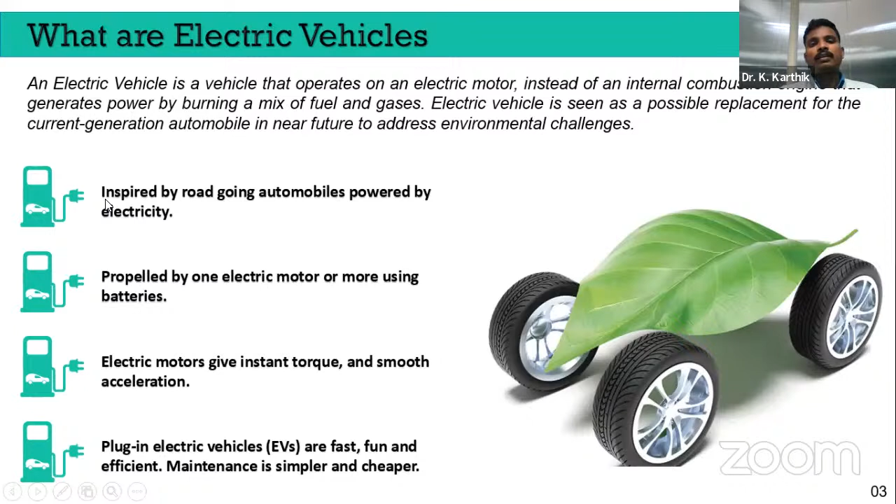It is having a lot of positive signs. First one is... your internet is very slow. Oh yeah.

So the first point is, it is inspired by road-going automobiles powered by electricity, so there is no need to fill any fuel, and it runs on one electric motor or more using batteries. We have a battery pack in the electric vehicle, so it can produce current automatically when you plug it in for charging. It has instant torque, and when riding you won't get much noise compared to diesel or petrol vehicles. So it is very easy, fast, fun, efficient, and maintenance is much easier compared to non-electric vehicles.

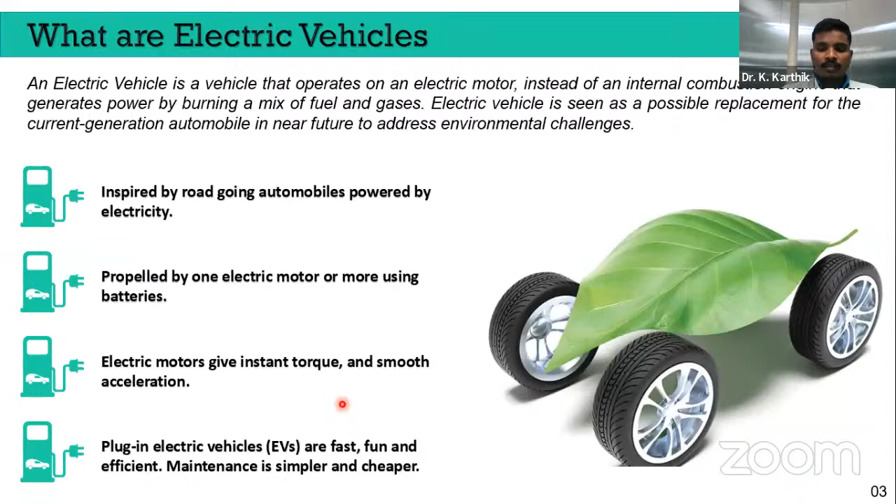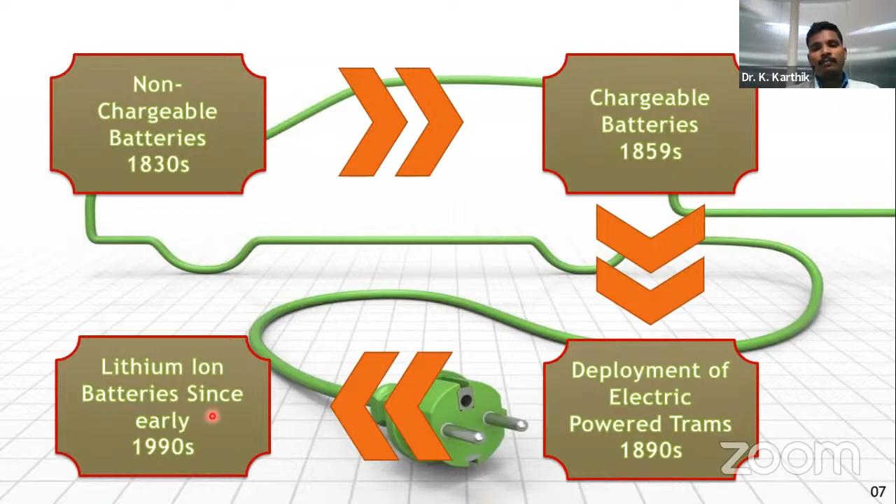After that, we are facing a lot of improvement in the electric vehicle. So why are we moving into EVs? The number one consideration is air pollution. By using fossil fuels, the emission of CO2 and all the gases is causing air pollution.

According to Greenpeace research, they were checking the air quality in India, taking cities like Delhi, Mumbai, Bangalore, Hyderabad, Chennai, and Lucknow. Compared to other Indian states, Delhi has the most pollution. If you see the estimated death rate because of pollution, Delhi is the number one pollution place.

Out of the most 30 polluted cities, more than 22 states covered in India are around 41 percentage NOx emission. This is in Delhi, due to high vehicle use in 2020, we are getting 41 percentage of emission. Also PM2.5, in Delhi it is 23%. This data is up to 2020, we didn't get the updated data.

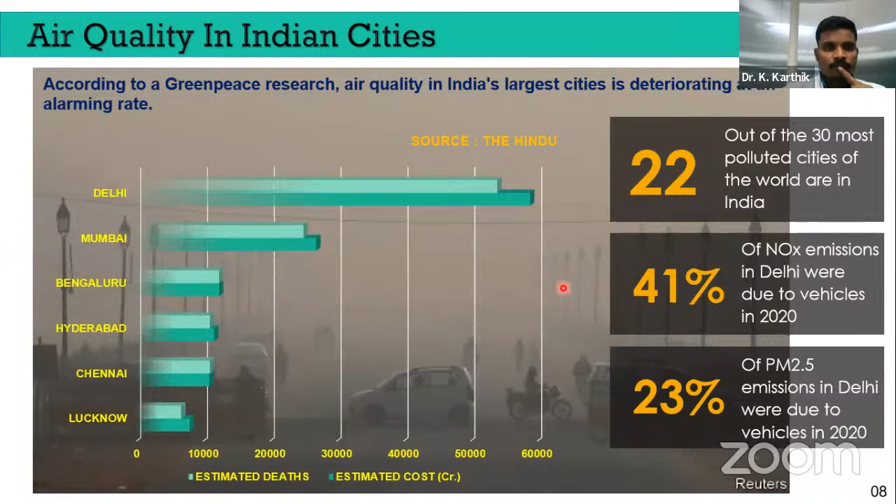So to overcome that problem, if you see this PPT, the carbon emission we can calculate by using different kinds of vehicles. Up to 15 percentage CO2 emission is because of advanced internal combustion, since we are using so many trucks, flights, and so many things, emitting more CO2. 10 to 30% is due to natural gases and biofuels.

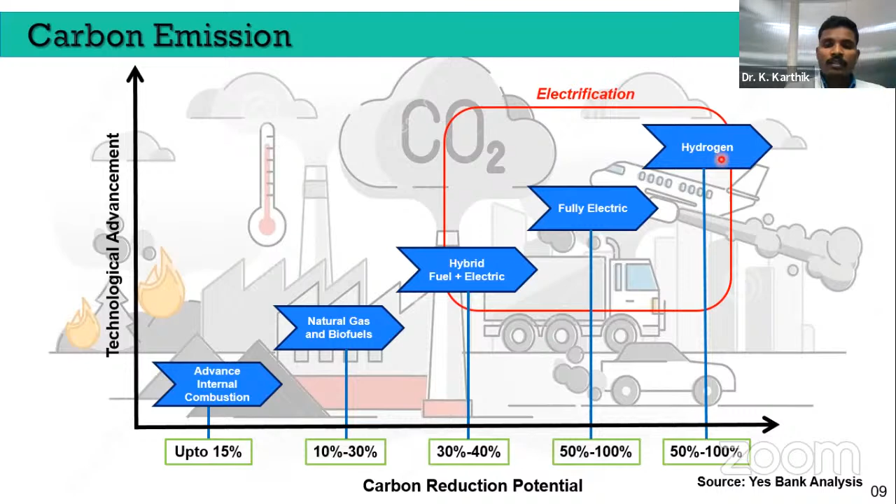If you take hybrid fuel plus electric vehicle, we can see 30 to 40% CO2 emission reduction. If you see the fully electric vehicle, it is 50 to 100 percentage reduction potential. If it is hydrogen storage vehicles, it's the same thing. Fully electric vehicles as well as hydrogen storage vehicles can reduce CO2 emission up to 50 to 100 percentage.

And number of deaths due to pollution: all over the world, the number of deaths due to pollution is much higher in India. The Philippines has 0.09 million, Brazil and Congo have 0.1 million, the US has only 0.15 million. If you consider India, it is 2.51 million per year. So it is very huge. Why? Because we are using petrol diesel vehicles, and due to that pollution, this much death is happening in India.

Compared to other countries, we are seeing the topmost 10 countries. Among them, India has the topmost death rate.

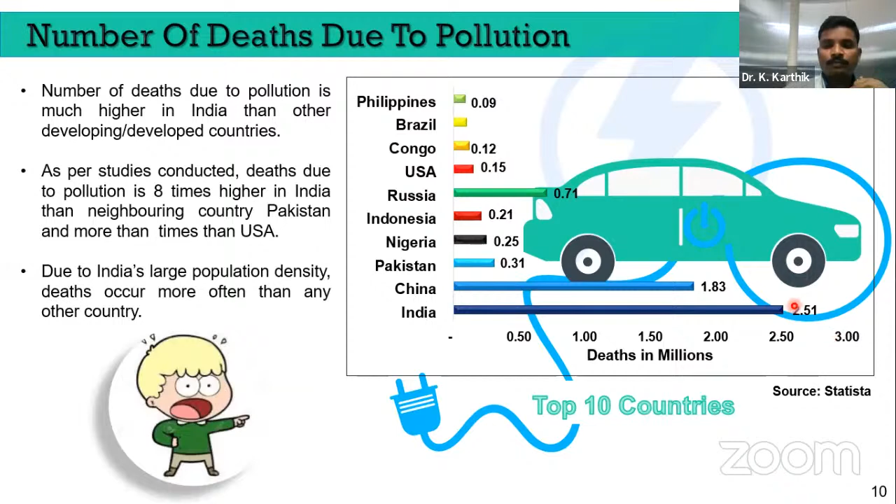So how can we control that emission, and what is the average lifetime of the emission? If you see all the petrol diesel vehicles and so many factories, because of this the emission is increased. And if you do electricity from coal, oil, gas, that also will cause CO2 emission.

So if you see this graph, the lifetime greenhouse emission depends on the types of vehicles consumers are using. If you consider the conventional petrol vehicle, emission is up to 25 tonnes. Hybrid vehicles show 20 tonnes, almost 5 tonnes lesser than conventional petrol. Battery vehicles show almost 15 tonnes. So this is the average lifetime CO2 emission. That is the only reason we need to move into EV vehicles.

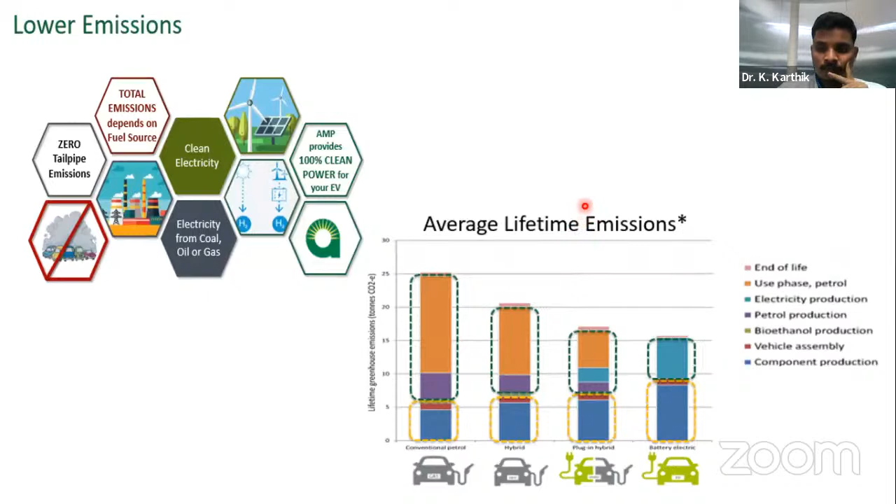So what is the major factor that attracts people into the EV world? One should know some basic parameters: reliability and affordability. When moving into any new system, first we need to think whether it will be reliable or not, and then affordability. So affordability-wise, we are comparing the price of conventional vehicles versus EV vehicles, and how the infrastructure is growing.

Growing infrastructure means, if you are using conventional cars, we can see a fuel station every 1 kilometer or maximum 5 kilometers. But for EV vehicles, nowadays the infrastructure is only growing slowly. So that kind of infrastructure facility we need to check, also service centers and all.

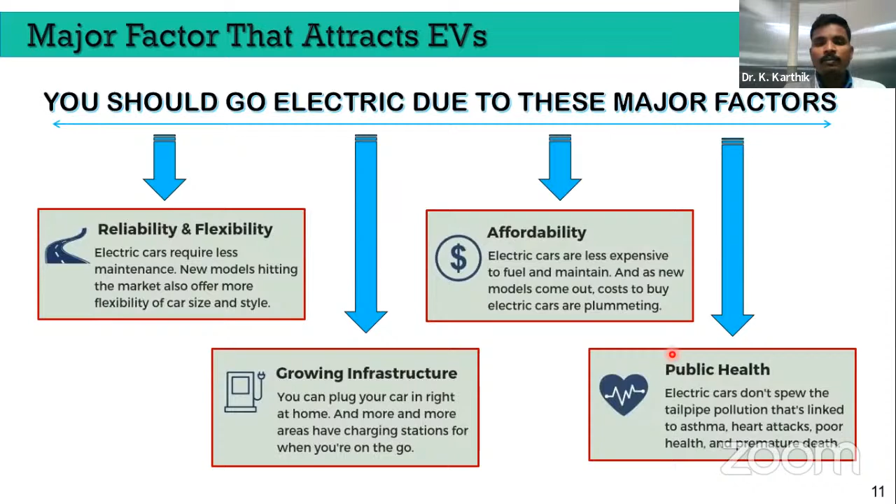Another main thing is public health. By using electric vehicles, what emission will it emit, and what kind of impact will it create on the public? That kind of thing we need to consider, along with a comparison between electric and petrol vehicles. So it is the main parameter for why we need to move into EVs.

So if you see the model, ex-showroom price, HSS means nothing but home storage system as well as large scale storage, and this is a petrol vehicle. So the ex-showroom price for the lithium ion battery car is 87,790 rupees. If you consider a lead acid battery, it's 35,490. The petrol price comes around 60,849.

So if you are considering CO2 reduction by EVs in the last 5 years, it is very much less. If you see lithium ion batteries, it is 1.9 percentage only. If you take lead acid or some other vehicles, it causes almost 2 percentage. So this kind of thing we need to check.

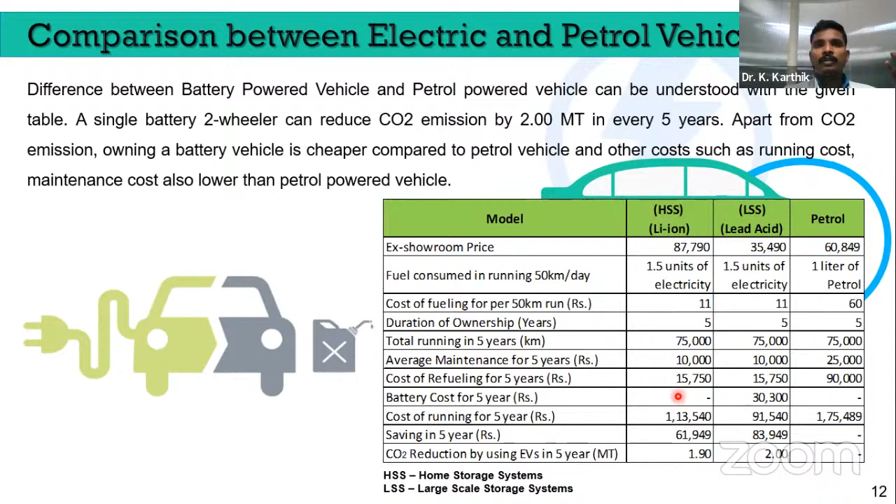Battery cost-wise also, for 5 years you don't need to worry about this battery, but for lead acid, every 5 years you want to replace it, and every year it will cost this much price. But for EV vehicles, you don't need to worry about cost-wise. Once the discharge is over in your battery, you can recharge it again.

For EV vehicles, every government is having so many policies, and they have initiated some rules and regulations, and some subsidies also they are giving. So that kind of thing we are going to see in the upcoming slides.

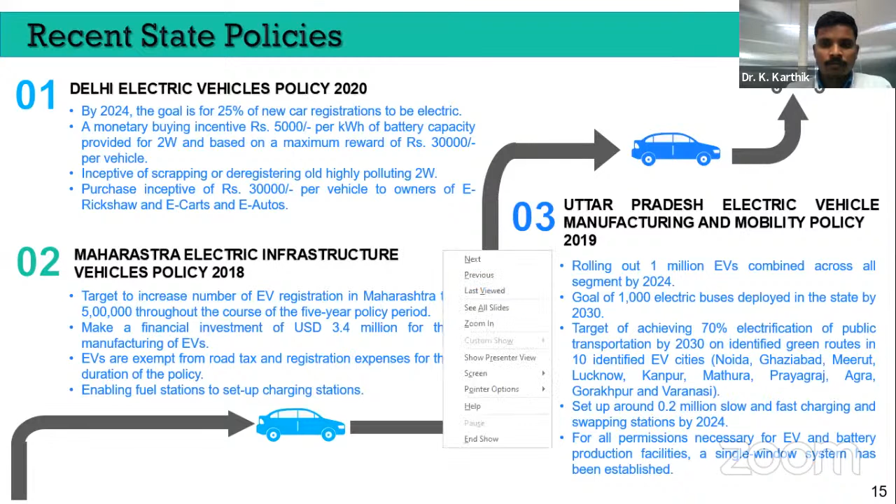Our Tamil Nadu government also has a vehicle policy from 2019 to make Tamil Nadu a hub for manufacturing EVs and related equipment. In my area, called Pochampalli, we have the Ola factory, which produced more than 2 lakh electric vehicles last year.

They are giving a lot of investment and encouraging investment in electric mobility. If you want to start an electric vehicle business or factory, they provide a lot of funds to consumers, along with 100% exemption from registration fee and 50% exemption from motor vehicle tax.

As mentioned, registration is free for EV vehicles, and there's almost 50% tax exemption available on taxes we'd normally need to pay, along with 100% exemption from electricity duty for e-charging stations — wherever you charge, you get some offer.

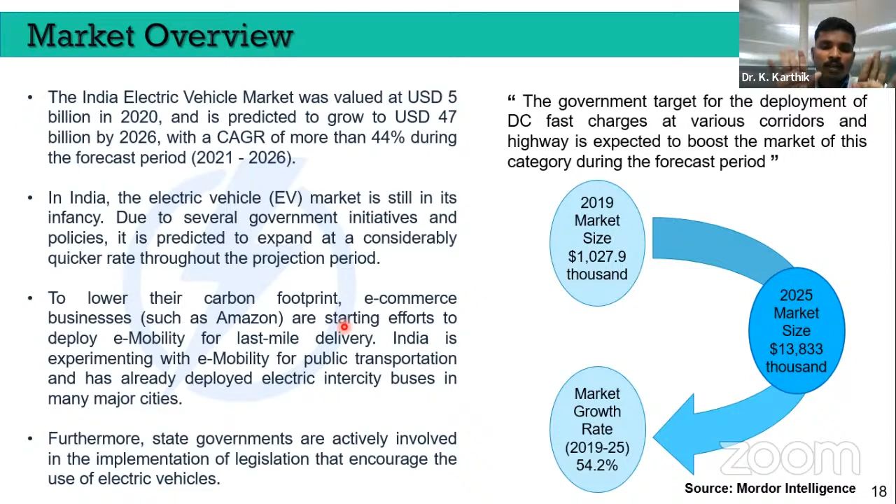The key players in India for two-wheelers include Ajanta Manufacturing, Ampere, Avon Cycle, BPG, BSA, Chris Motors, Eko, Electrotherm, Hero Motocorp, and Honda, as well as YO Bykes and Ola. These are the major players in India for two-wheelers.

For three-wheelers like auto and taxi, key players include Bajaj Auto, Electrotherm, and Mahindra and Mahindra. For four-wheelers, Mahindra and Mahindra is playing a role everywhere in EV vehicles and buses. For HDVs, Volmac Engineering and Volvo are currently the key players, playing a major role.

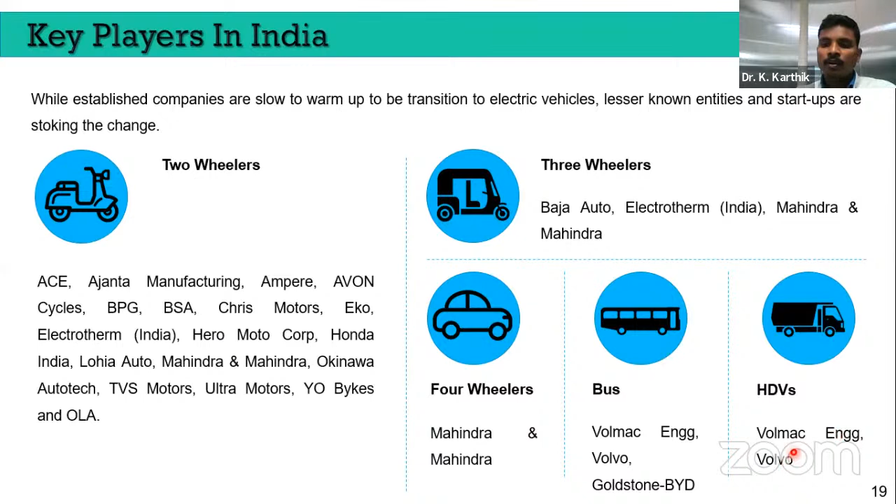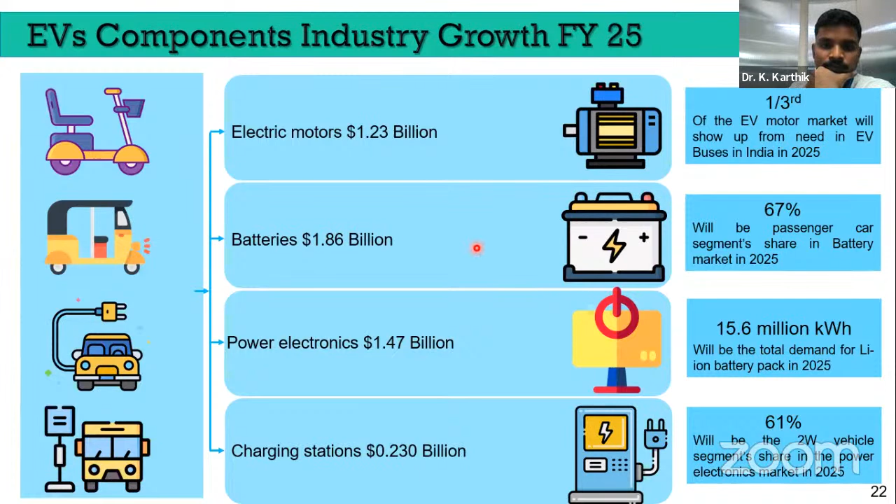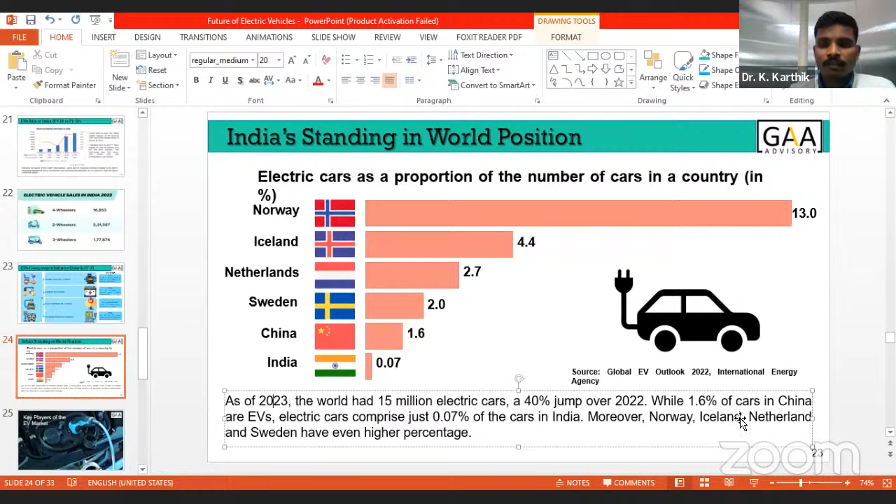As of 2023, the world had 15 million electric cars. We are expecting almost a 40% jump over 2022 as well as 2023, and we are in the last position in this chart. So we are also slowly growing. Definitely we will reach at least 2 or 3 places up in the upcoming years.

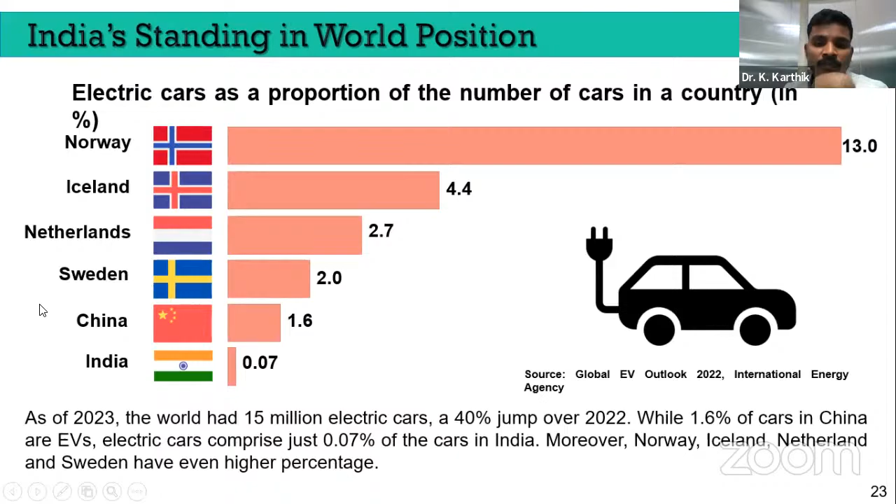If you consider the 10 most popular electric car brands, the first one is Tesla. Wherever you go, you can hear about Tesla. Tesla is basically a US company, and they are number one in EV vehicles. The Tesla Model S car is around $119,000 in value. This shows the car price and how many EV vehicles are sold by all the brands. Next is Jaguar, Mercedes-Benz, BMW, Nissan, Kia, Hyundai. All other companies are also playing a major role.

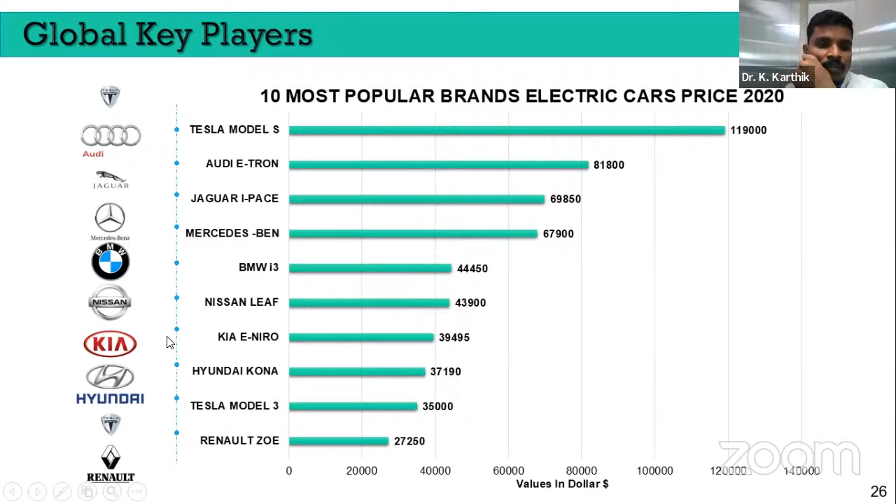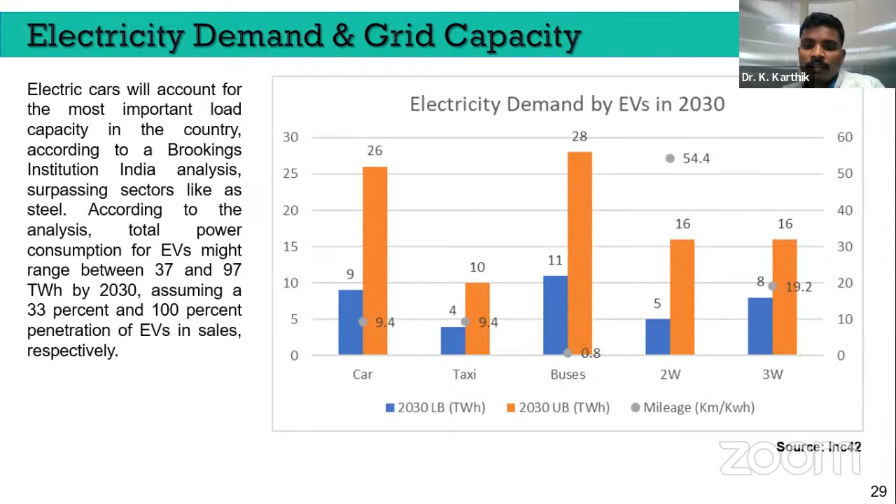So how much terawatt hour will it need by 2030? As I said, the electricity demand will be there as India prepares to achieve 30% market penetration into electric cars by 2030. Definitely we will face the electricity problem, and we will see how the Indian government takes care of it, giving 80% of the country's population access to electric vehicles in India. We are expecting the requirement of electricity consumption to be around 100 terawatt hour - very huge, about 5% of total electricity by 2030.

According to NITI Aayog's energy policy, they have done some study and released data showing that India's energy consumption would double by 2040. Of course, if everyone is using electric vehicles, definitely the electricity demand as well as the needs will increase. So we need to overcome this kind of problem - that is our next headache.

So at the last, these are the conclusions. We have gone through the EV industry and what is the expected performance of electric vehicles compared to conventional cars or bikes. It didn't quite deliver on all fronts, and these results are having a mixed reaction in the industry.

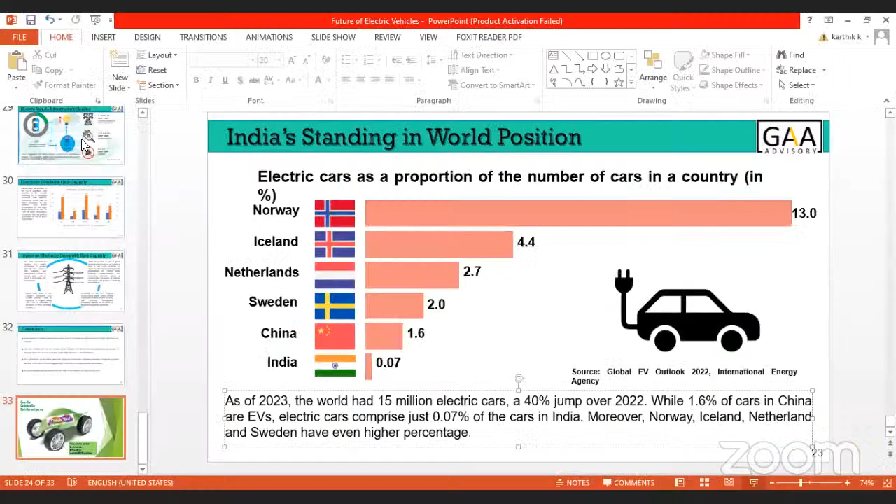Hi sir, I am Surender. Sir, most of the EV vehicles, the cost will be high, but the awareness among people is not coming up, sir. Main reasons are battery issues and vehicle service provider side issues. What are the problems and how are they rectified, sir?

Actually, in the EV market, we are facing problems mainly because of battery charging. Normal people don't know about battery chemistry. If we are providing any EV vehicle, there is a certain limit - this much charging you need to do, this much speed only you have to maintain. There are so many SOPs. If you are not obeying these limitations, we definitely face problems.

Whenever you are riding an EV vehicle, the battery normally tends to get heated. If you keep going for long distance with that heat energy, the battery pack will expand. During the expansion, inside the battery we have lithium metal, and that lithium metal will touch the anode and cathode, creating a chance of fire. Because of this, such accidents happen.

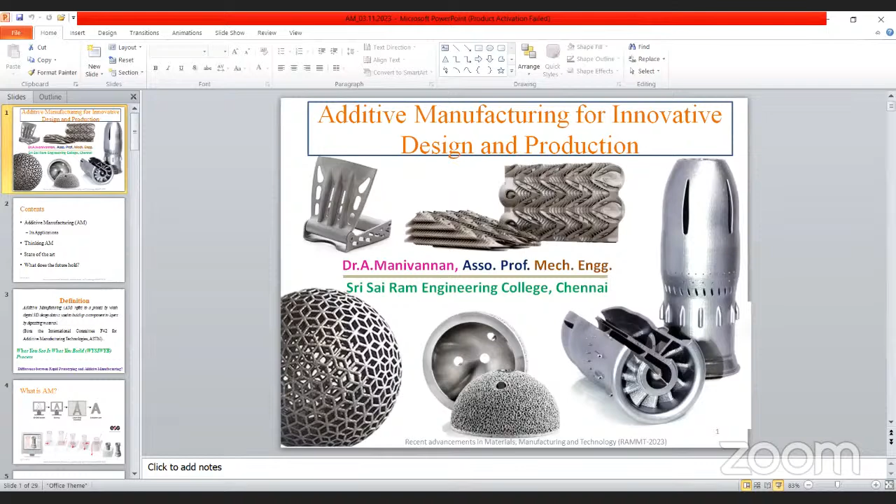Hello everyone, good evening. This is Manivannan from Sai Ram Engineering College, and I'm going to talk today about additive manufacturing for innovative design and production. Arriving at this title itself is quite tricky. How come additive manufacturing, we all heard about it very commonly, is a layer by layer manufacturing process. There is also one more thing, that is subtractive manufacturing. So how come innovative design and production is going to help in the context of additive manufacturing? This is what I'm going to talk about.

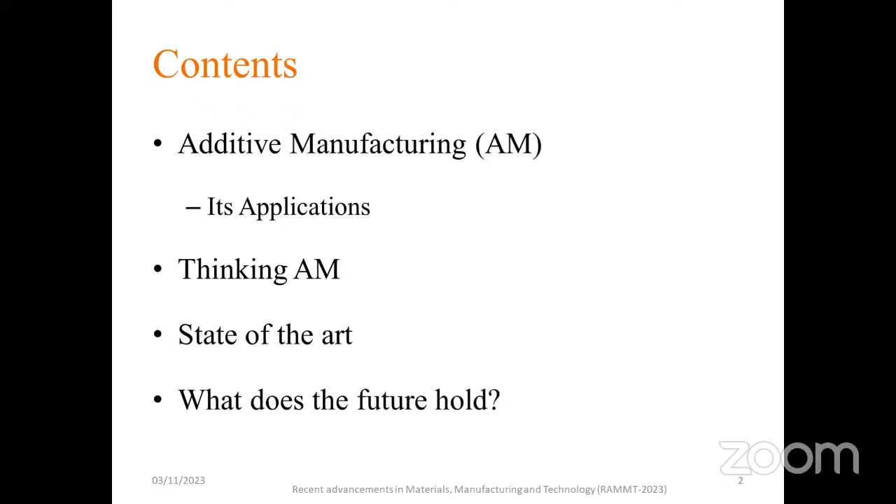Next, what does the future hold under additive manufacturing? Any technological innovation has pros and cons that we are going to deal with. Next, this is the definition of additive manufacturing, as per the ASTM standard. Additive manufacturing refers to a process by which digital 3D design data is used to build up a component in layers by depositing materials. That is what the term additive manufacturing actually means.

In a broader perspective, what you see is... I think you all can view my mouse. Anyone can be interactive, please, sir. Hello, sir.

Yes, sir, okay. What you see is what you build. The miniature parts and components we are making come under the category of additive manufacturing.

In a narrowed down way, people used to call it 3D printing. That is the difference between rapid prototyping and additive manufacturing. Rapid prototyping is the miniature creation using other materials, like if we make a prototype of a 1,000-year-old temple or a monument like Qutub Minar using thermoset or thermoplastic materials—that is termed rapid prototyping. It is also very demanding in the plastic industry due to its intricate component manufacturing.

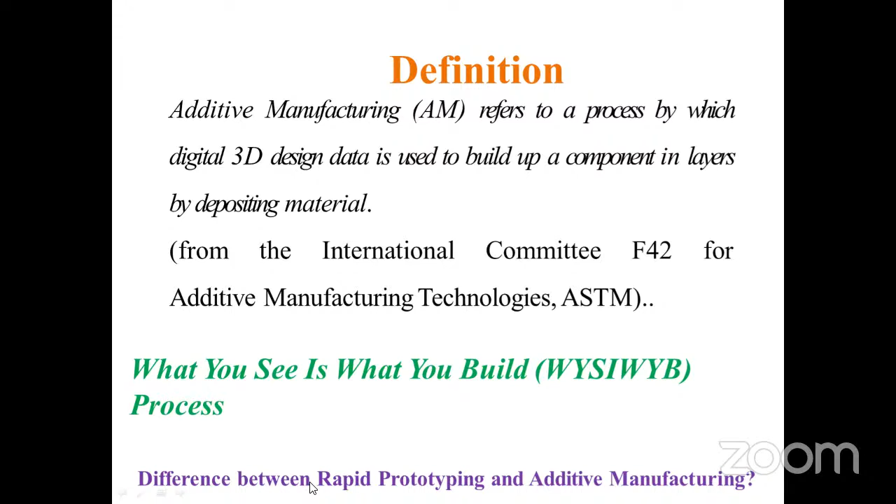3D CAD model—everyone is aware of it. Some may be aware of the slicing process. You have to 3D model a component, then it has to be sliced so that it can be assembled layer-wise into a final complete part. This is how it goes on.

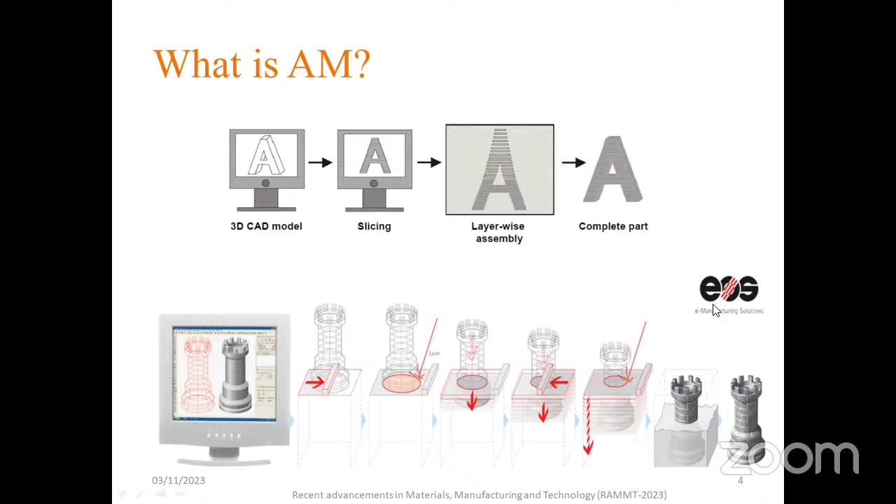Whereas for mass production components with precise quality, we go with additive manufacturing. The best process in additive manufacturing is SLM, and we shall look into it.

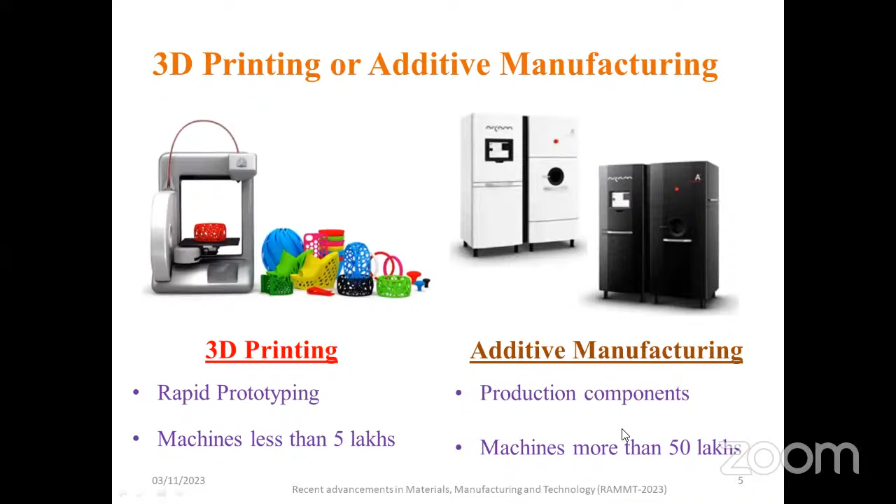The production components involved—the machines for manufacturing cost around more than 50 lakhs. These are all the components that can be manufactured using this process.

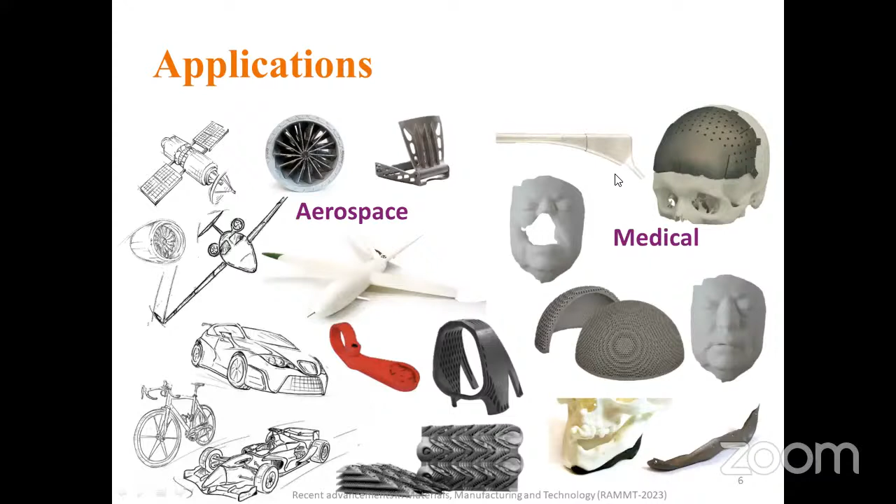Some applications are in aerospace industry and medical applications, even hip bone and elbow transplantation. Some people get injured in accidents, and their hand elbows can be replaced using titanium material. Most importantly, a particular titanium alloy is deeply researched for this additive manufacturing process. We will see more later.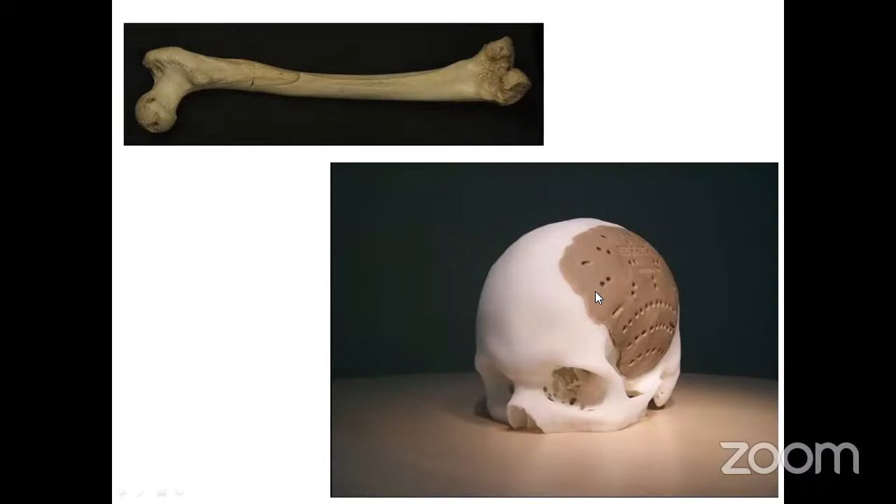As I said, bones can be replaced using natural organic material combined with metal, giving higher endurance. In some cases, even skulls affected by major accidents can be treated this way.

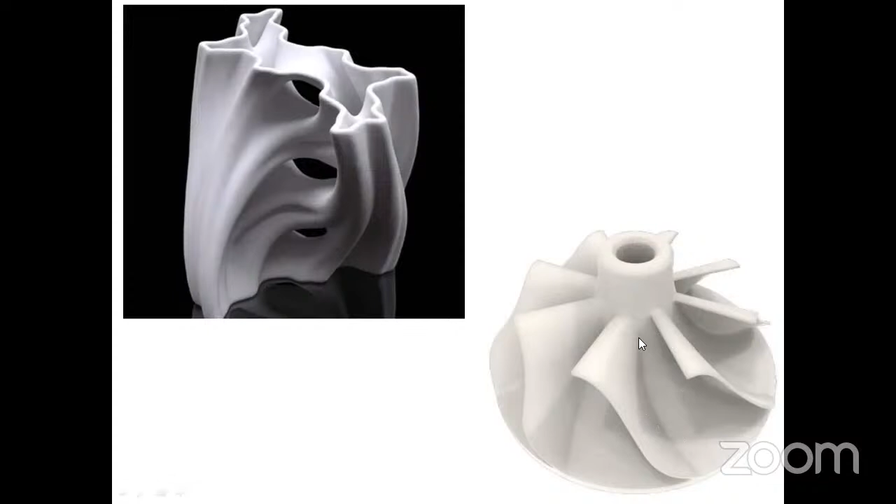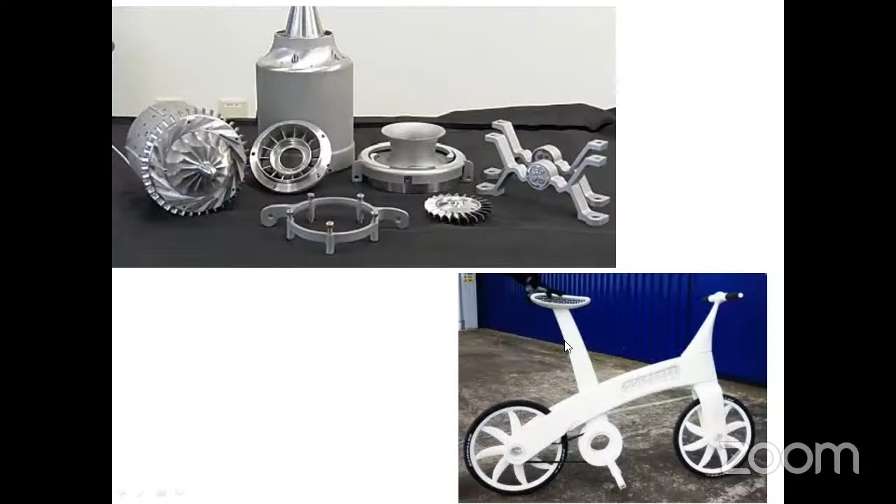Next, the additive manufactured bicycle and additive manufactured mechanical components of varying types.

It can be of two processes: additive manufacturing and subtractive manufacturing. Based on part complexity, these parameters decide the component and the customer requirement, and end-user friendliness decides the type of manufacturing process, whether additive or subtractive. Part complexity decides it, along with the material used, the manufacturing cost involved, the part quantity going for assembly, the speed of manufacturing required, and the time needed to deliver to the customer.

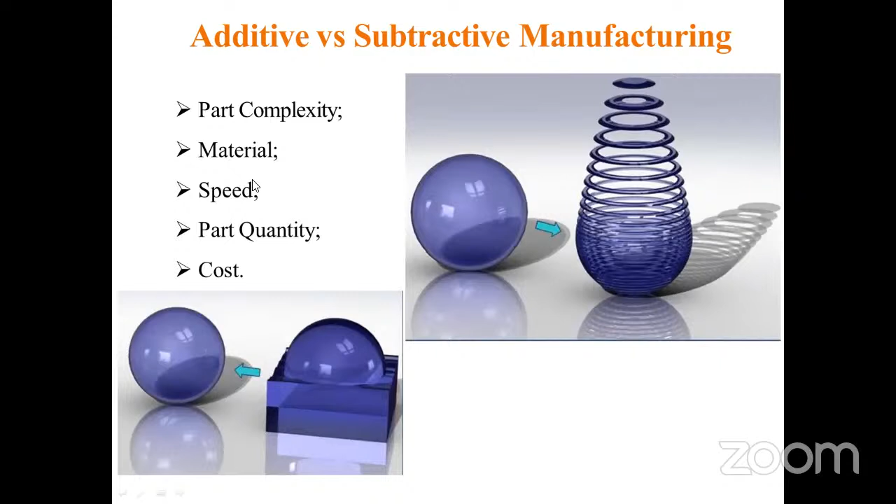See, this is the best example of additive as well as subtractive manufacturing. The additive manufacturing, the cup is manufactured by means of additive manufacturing, whereas the internal features cannot be machined without a tool radius. This decides the design criticality about the additive manufacturing process.

The undercut here cannot be performed without more than a 3-axis machine. Every detail, the cavity here, even though it is formed by means of additive manufacturing process, to have precise accuracy, this part has to go through the subtractive manufacturing process. That is where we can get the most precise accuracy of what we require.

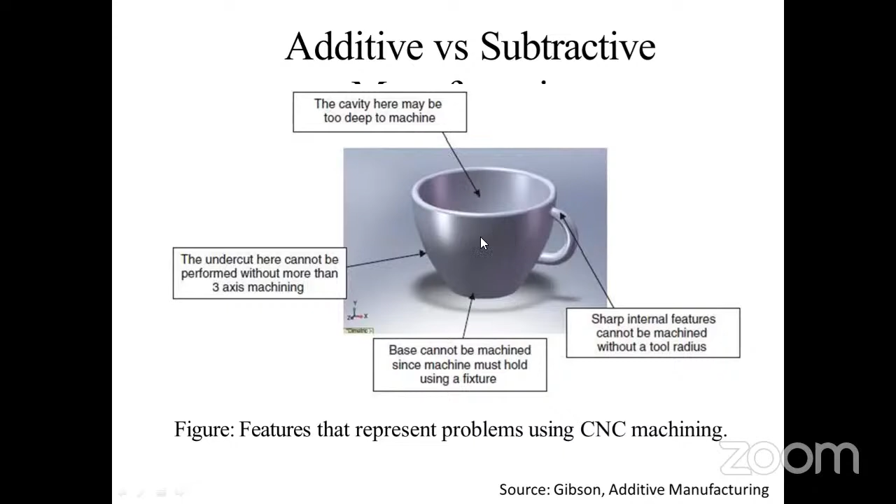These figures represent problems using CNC machining. So our topic deprives over the design. The future slides will be based on the innovative design practice over the additive manufacturing process. The source of this document is from Gibson's book on additive manufacturing. I will share with you the references I had for this session. This is the ultimate process of getting a 3D model into a usable product, that is CAD.

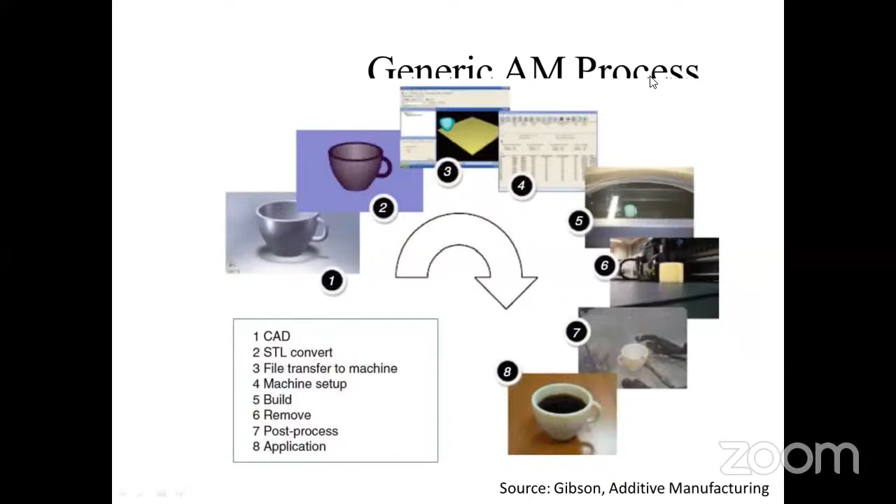Next, STL converter. After STL converter, the file is transferred to the machine. Then the machine setup for the CNC machines. Next, it is the build up and removal process. Then next, post processing of the component. In the build up process and removal process, it is CNC process. Next, the application where we are utilizing the product. It's a generic additive manufacturing process actually.

As I said earlier, additive manufacturing for innovative design and production - I have coined this term for this session based on a video which I would like to share.

Sir, can I share that video? Yes, sir, you can share. Okay.

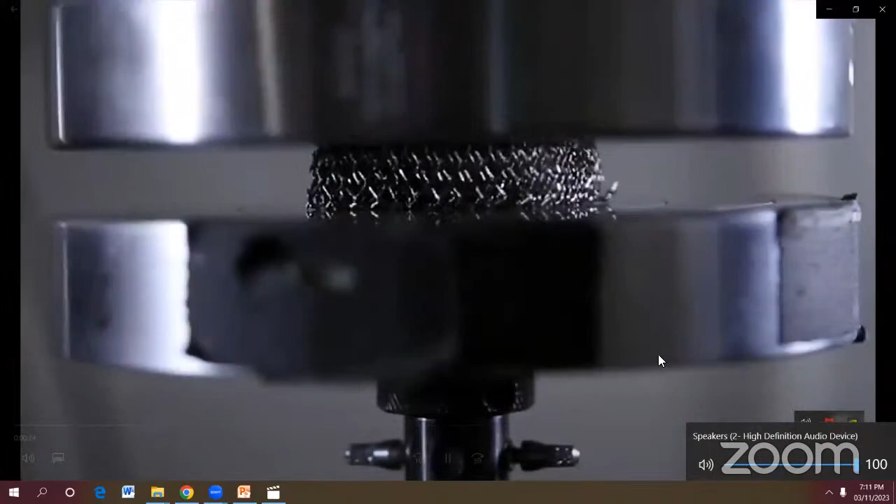Sir, is it audible to you all? Your voice is not coming. You can see the movie.

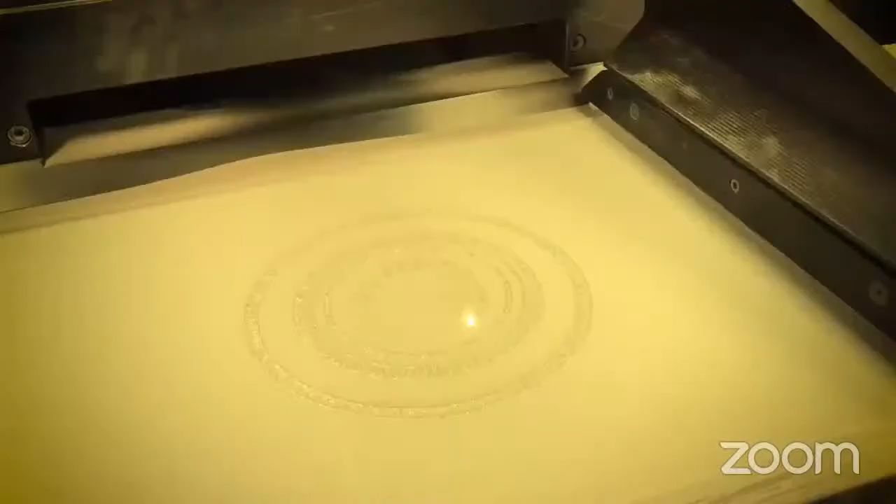This you can see in our brochure actually. I have shared it with the coordinator before deciding the title.

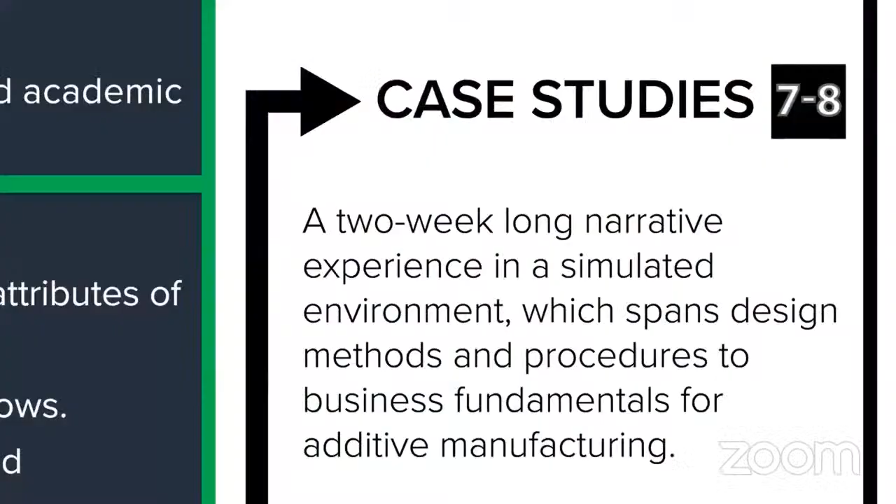I have taken this video from MIT actually, MIT website, and I'll share the link in the chat box after the session, and you all can have it.

Now is it audible, sir? Yes, sir. Yes, sir. Okay. One moment, sir. I hope now my screen is visible, sir. Yes, sir, Vishnu.

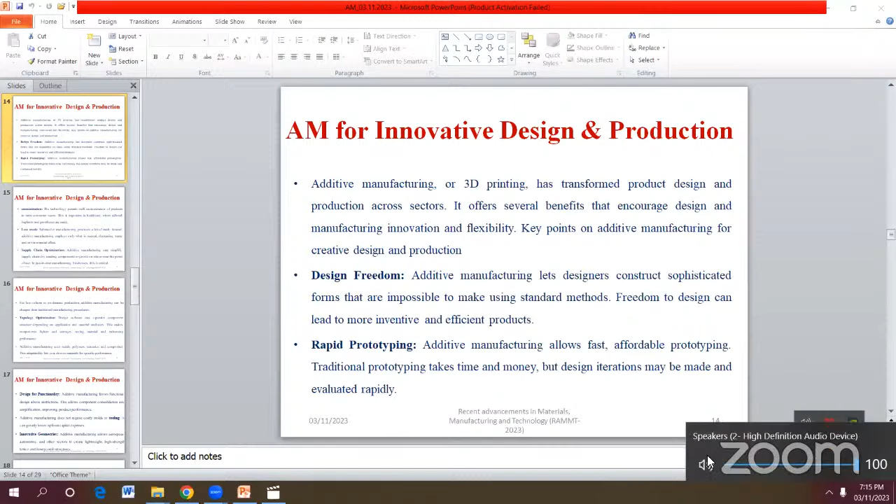Sir, this video made me arrive on this title actually - additive manufacturing for innovative design and production. Why? Because the innovative design brings a fascinating and possible outcome of the best we can do.

So the better best can be achieved by 13 points, which are like a Bible for additive manufacturing - design freedom and rapid prototyping are key points, and I'm going to talk about this. First, design freedom. Additive manufacturing lets designers construct sophisticated forms that are impossible to make using standard methods. Freedom to design can lead to more inventive and efficient products.

RPT offers affordable prototyping compared to traditional prototyping, and also it takes less time and less money. The design iteration can be made a number of times. That itself is possible for arriving at a creative, innovative design.

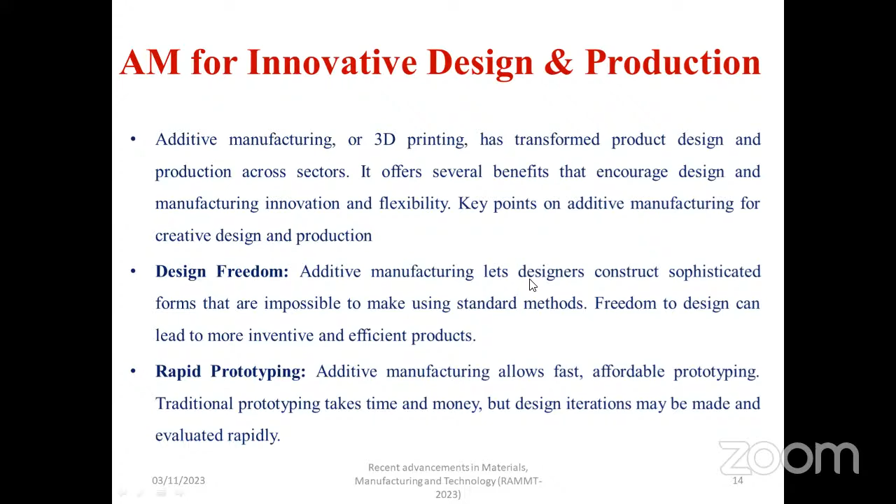Next one is customization. We can customize to our own specification, whatever we need. When we think of customization, you can compare it with your mobile phone. See, the number of variations we are having with our phone.

This was not the case 30 years before, or before 5 or 10 years. We didn't have that much specification of customization. Now we are operating banking over phone. Before 10 years, it was not possible in India, literally not possible over phone. Now customization has changed the entire bank process into the mobile. So innovative design makes everything fall into place.

The technology permits bulk customization of products to meet consumer wants. This is most important in healthcare, where tailored implants are most preferred.

Okay, and less trash - whatever we do, the trash components should be very less. Whether we make any component or whatever we do, we don't want much trash. So subtractive manufacturing produces a lot of trash, which creates mental agony to the creators. Instead of subtractive manufacturing, we shall go with additive manufacturing, which employs only what is needed, decreases waste, and is environmentally friendly.

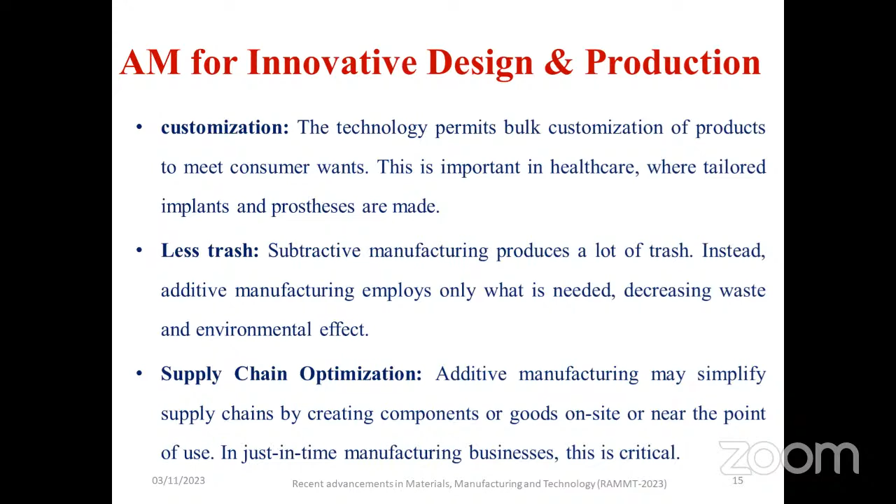For low volume or on-demand production, additive manufacturing can be cheaper than traditional manufacturing processes.

Next is topology optimization using design software. It reduces the effort of trial and error for components. We can monitor and analyze the system using analyzing software, then arrive at the optimization process. Topology optimization helps produce lighter components, with reduced density, high endurance, and more stiffness.

Material saving is also higher, which gives higher profit for the company and higher performance of the product.

Additive manufacturing uses materials like metals, polymers, ceramics, and composites. Nowadays, metal additive manufacturing is also booming.

You can also refer to an NPTEL course on metal additive manufacturing by Professor J. Ram Kumar, IIT Kanpur. It's a very good course. Those who are keen on the process of additive manufacturing, or involved in the initial phase of research using additive manufacturing, can take that course and gain much knowledge. It would fetch you more knowledge.

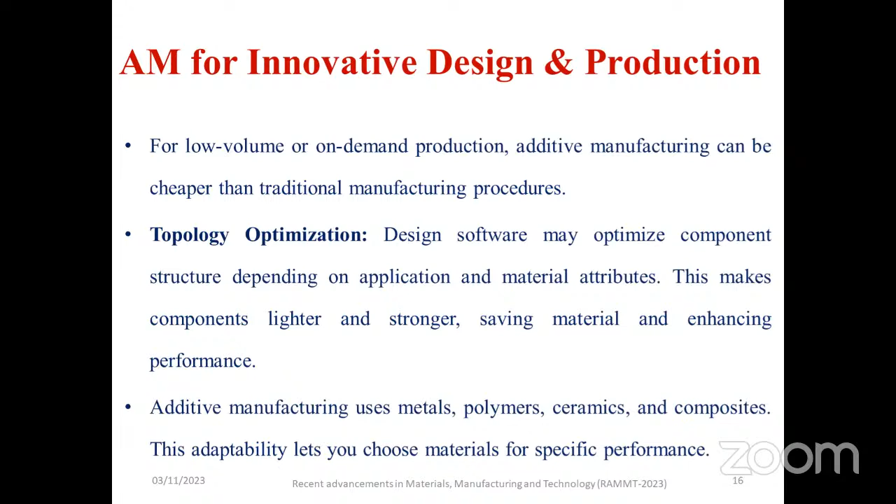That's my personal recommendation. Next is design for functionality. Any component, whether of a laptop or a mobile phone, we design for functionality. At the end of the day, if it is not functional, it is an obsolete component.

So the additive manufacturing favors functional design far beyond restrictions. This allows component consolidation and simplification, enhancing the performance of products. Additive manufacturing does not involve much costly molds or tooling; it refers to minimal capital expense.

Additive manufacturing also allows more aerospace and automotive components to explore lightweight and high strength designs, even honeycomb structures. In a future slide I will show you the honeycomb structure - we had also seen it in the video. That is a critical structure made possible with the innovative design capability of additive manufacturing, leading to possible production.

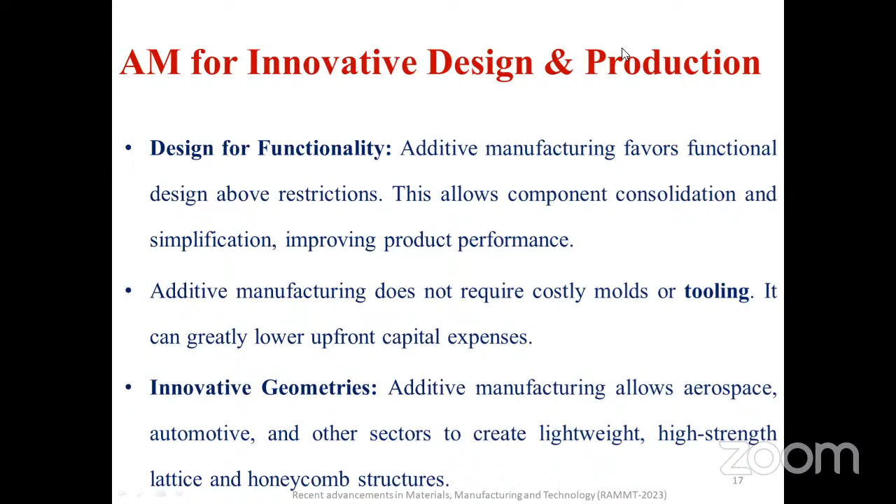Next is repair and maintenance. This is where the mechanical industry spends a huge amount of money. On-site repairs and maintenance using additive manufacturing reduce downtime and costs for enterprises using vital machinery and equipment.

Traditional machines, computer numerical control machines, CNC machines, and FMS machines - that is flexible manufacturing systems - I have vast experience over FMS also. The repair and maintenance cost demands a huge chunk of your profit margin.

So to accommodate this, people are moving beyond capital investment nowadays. Manufacturing chains like GE and Boeing are making massive investments in additive manufacturing. The slides are there to evidence it.

Next is bioprinting. As is very evident, medical additive manufacturing would create tissues for transplantation and organs - like bone and ligament fracture repair - and for research. A lot of researchers are working on bioprinting and medication testing.

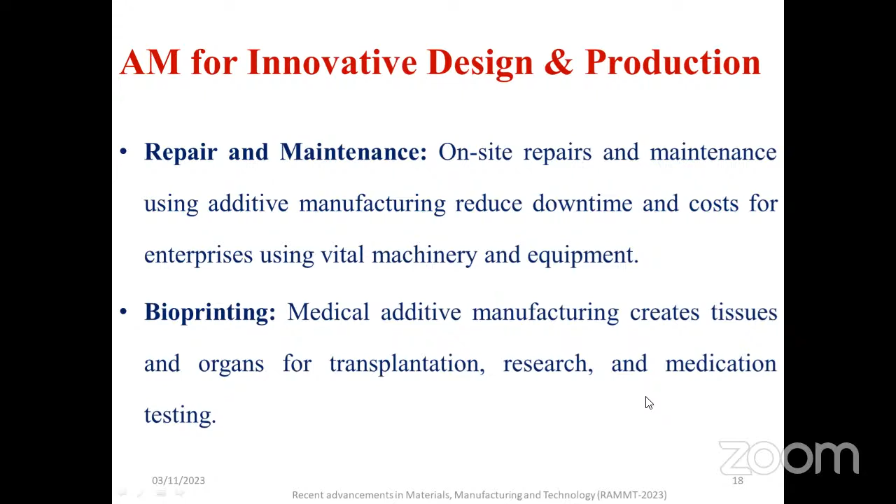I would suggest young minds concentrate more on bioprinting in additive manufacturing. That would be a brilliant boom for our mechanical industry as well as the interdisciplinary biomedical industry.

For any technology, there will be an exaggeration curve. I hope everyone can view this. When it is triggered, the technology trigger started here, and the visibility for it attained a peak.

Then the inflation happens, through the disillusionment, where expectations didn't meet demands - that's where the inflation occurs. Then additive manufacturing reaches the slope of enlightenment, where the pros and cons are realized. Investors get into the plateau of productivity, where it booms in a consistent way.

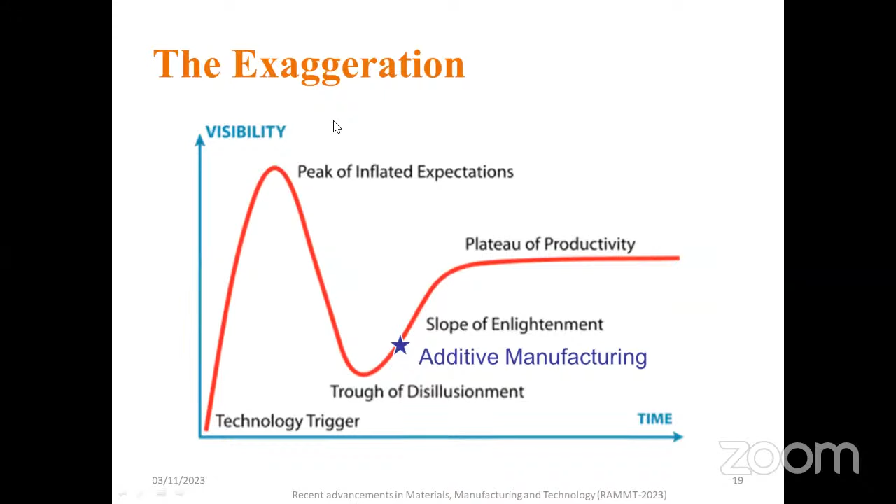The time and visibility chart has shown the exaggeration over how this technology has been arrived upon. This I have collected from a web source.

The key points over the additive manufacturing design components. The need to design for additive manufacturing is tremendous. Why? Because all are intricate components. When we go with additive manufacturing, we are going with highly critical geometry.

First case, next the focus on precision, accuracy, and also third case, the time frame, and also last one, the efficiency. The reduced weight, the scrap, and the cost, and also the combined components. At most, if we follow all these parameters, the cost can be cut down.

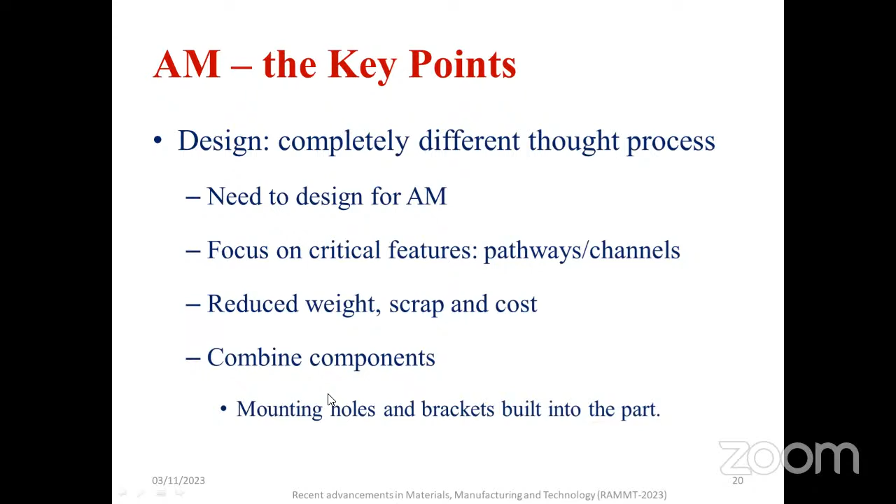The mounting holes and brackets built into the part itself, the holes and brackets, whereas in the conventional machining process, we cannot go with this cushion of getting the manufacturing done.

The process, after the design, it's not self-supporting. It may require supports. The process requires supports. What type of supports? The investment of a machine.

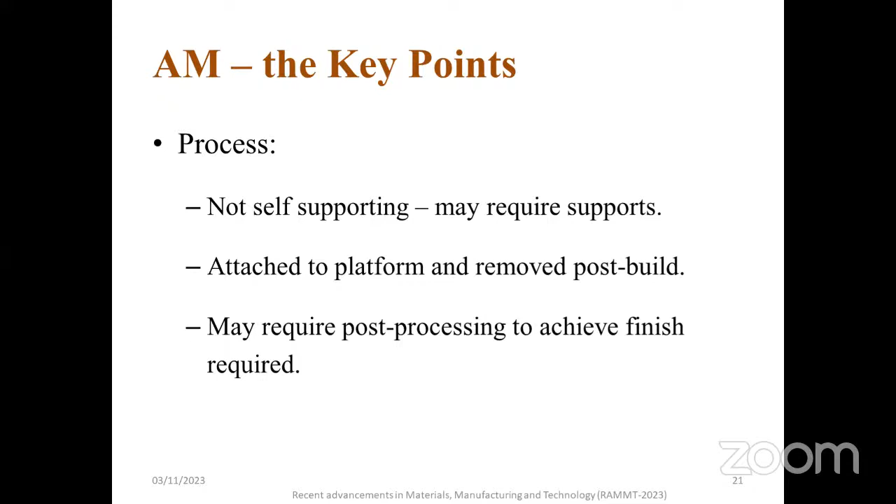Next, also raw material supply, and also like an FMS. It needs a computer, it needs to be sliced, and then transformed, attached to a platform, and removed post build. It may require post processing to achieve finish required. For high precision quality, the surface finish, that needs post processing of every component.

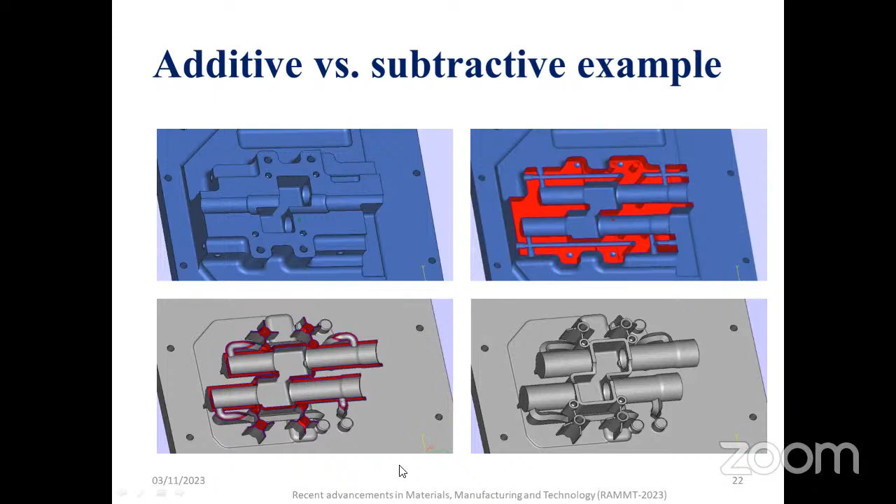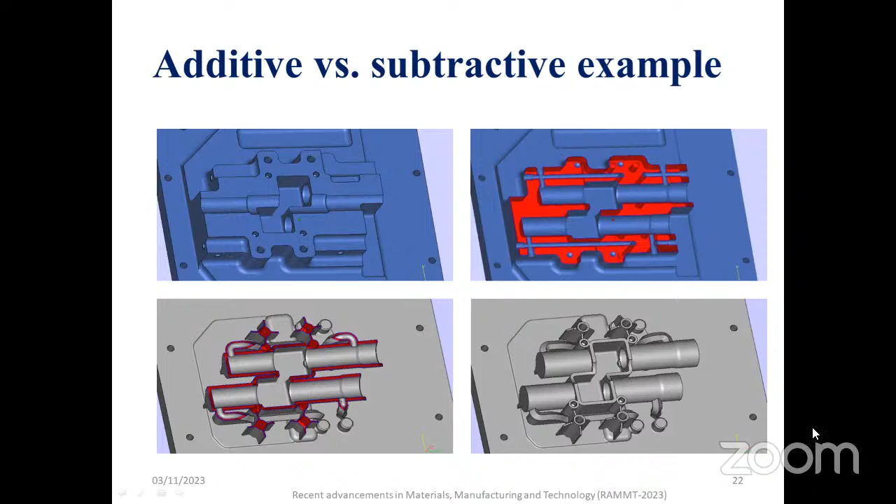Left side bottom shows again the geometrical criticality, the geometrical intricacy of the component. And the last one shows the extrude property of the outer case of the component. So here comes our component. The final part, it is a mass reduced to 30% of its original.

And in most cases, reverse engineering of components are most preferably done with additive manufacturing. Why? Because first of all it's a reverse engineering process. Second, it's cost efficient. Third, the intricacy of the component, the geometrical variation can be done very easily due to the draft 3D modeling, and it can be converted into solid modeling.

The smooth flowing pathways can be attained. The final part, what are all the benefits? Higher performance. This made manufacturing lead time halved. So as all faculty members know, the manufacturing lead time influences productivity and affects the business of a company.

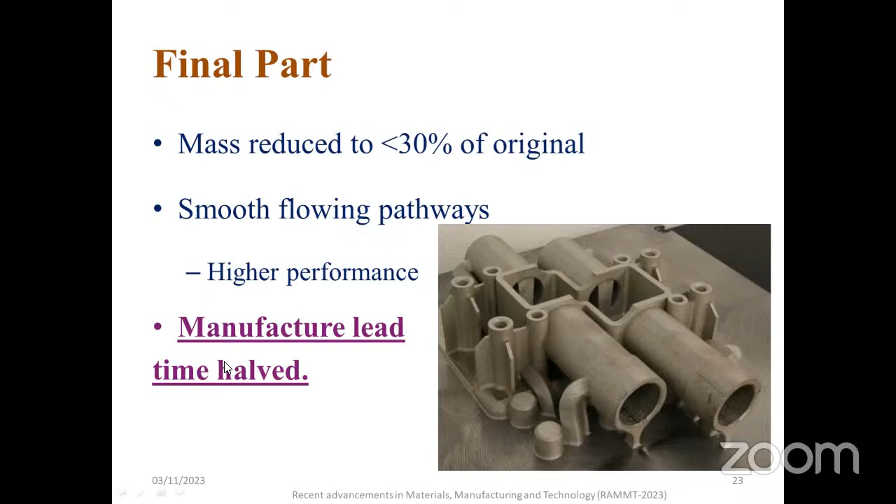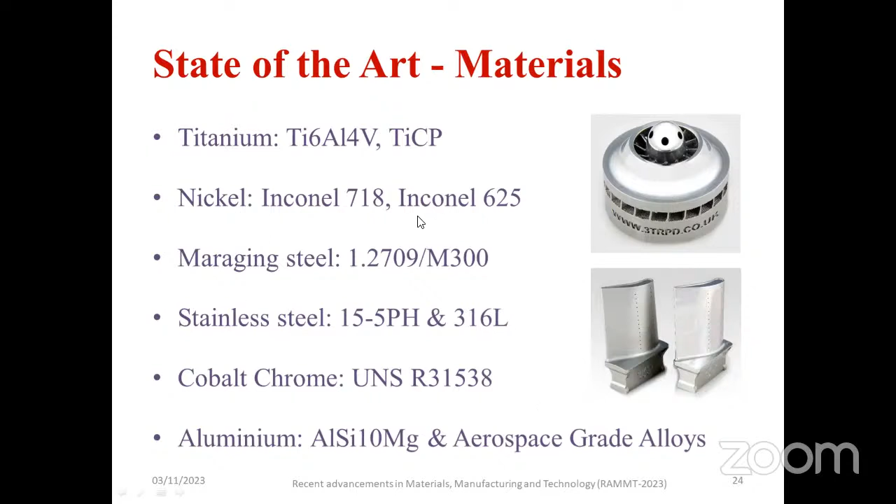This state of materials, not only - in the previous slide I have shown you plastics and polymers and ceramics can be additive manufactured, whereas metal can also be additive manufactured. And I have rightly said, there is a metal additive manufacturing NPTEL course for you also, run by an IIT Kanpur professor. You can follow it for getting into this type of metal additive manufacturing research.

Next is the future, what it holds on for additive manufacturing. GE have expanded tremendously rather than concentrating on other manufacturing modes. In additive manufacturing, GE has expanded. Its new LEAP engine will have 9 additive manufacturing parts. It will have over 1,000 individual components for it to make and assemble.

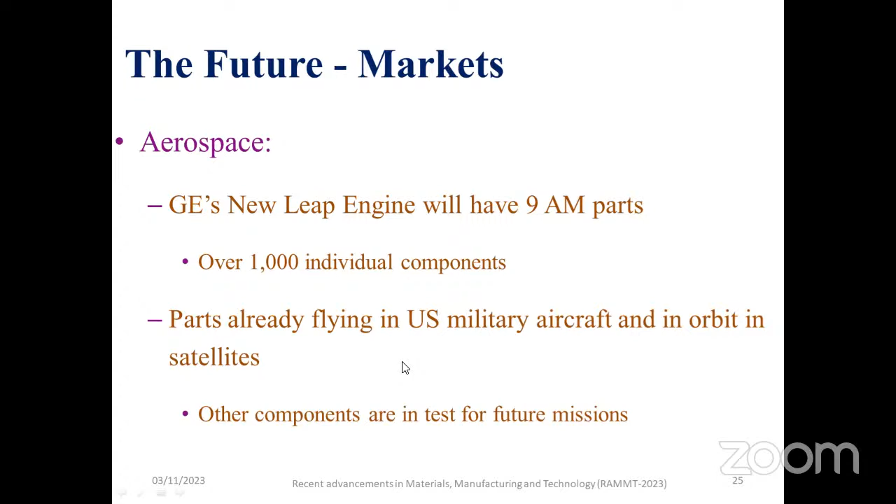Next, the parts already flying in US military aircraft and in orbit in satellites are additive manufactured components. Other components are in test for future missions in military aircraft as well as in NASA. Next, the future market.

The crucial components, the F1 racing people are very crazy about, and further components and materials are also being tested upon. Why, sir? The endurance limit. The endurance limit of the F1 cars needs to be high.

As you all know, the frequency of accidents is more in F1 cars, starting from the helmet to the component which is very least concerned about. It needs to have a high endurance limit, and the density should be supportive to the pilot of the car, so he should be capable of running at high speed.

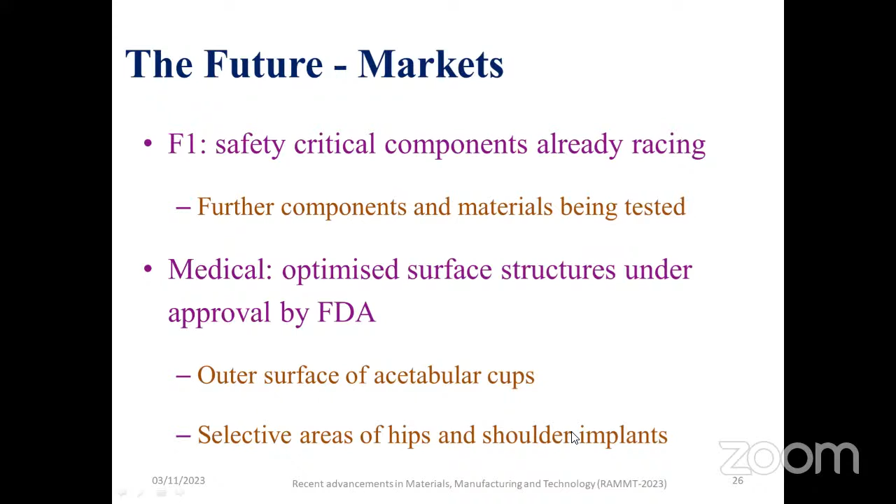For medical applications in the future, optimizing the surface structures and so on needs approval from the FDA. That's being researched actually. For the future markets, the research paper components are based on acetabular cups, hip bones, hip implants, and shoulder implants. Majorly people are concentrating on hip implants, and elbow and knee implants and transplantations, everyone is concentrating on these.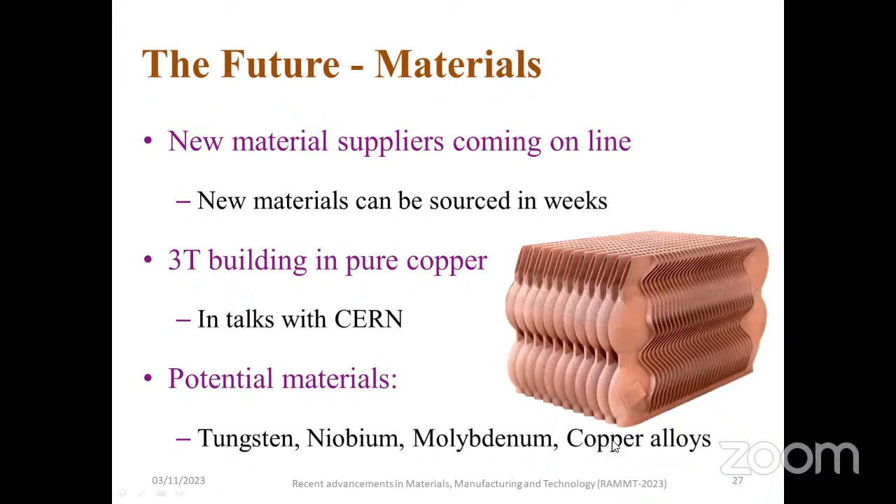What can the future materials be? Pure copper can be used for 3D building. Researchers are working on 3D building in pure copper, in talks with CERN actually. Next, new material suppliers are coming online. This will be for pure copper. This is also in research. The potential materials would be tungsten, niobium, molybdenum, and copper alloys.

This is the summary of what we had seen for this session, based on the additive manufacturing session. I can frame out the new opportunities: holes and channels, lightweight optimized structures, multiple parts built as one component can be additive manufactured components, and parts already in use for critical applications.

What I'm saying now is that it is in highly demanded applications, that is safety applications. Safety application meaning aerospace applications, flight, and mission critical applications. Even in the industry, additive manufactured components are nowadays being preferred.

The materials being developed and supply are improving. The new machines allow for more material. Machine research is also going on for additive manufactured components. The machines no longer have a limitation; that is technological growth.

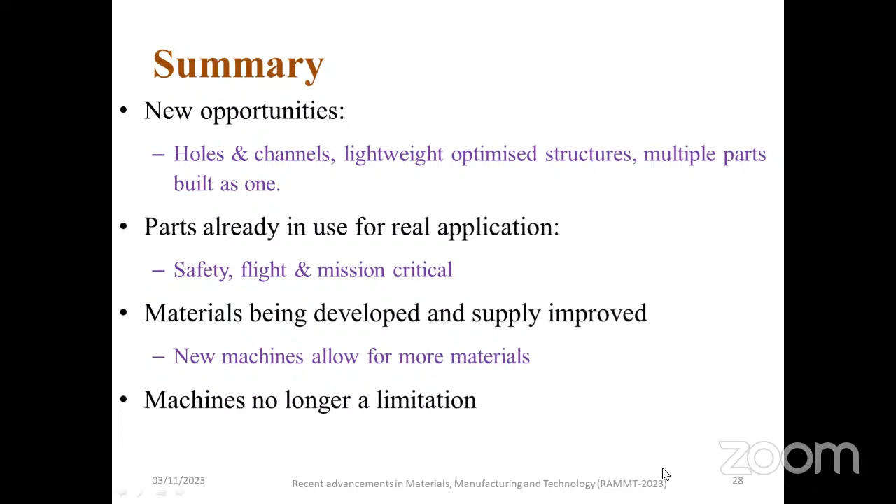Later on, we had a 3-jaw chuck lathe, 4-jaw chuck lathe, and high spindle lathe, over which we moved into shaping machines and then into milling machines. Then our requirements expand. There is no limitation for technology bound. That is what I had arrived at.

Thank you. Any queries, sir?